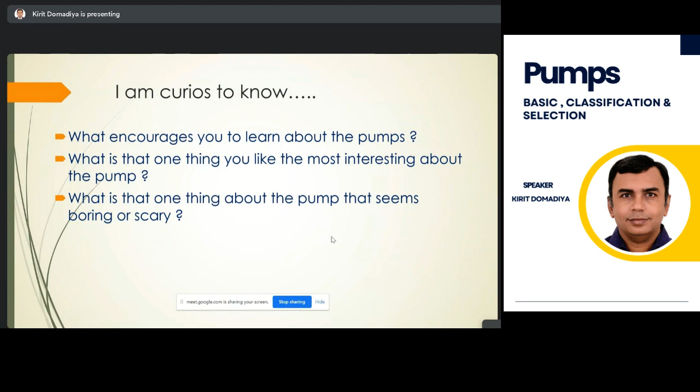Okay, let's get down to business. Now we'll start with the basics. So why, first of all, why pump? Whether it's a human body, or nature, or any industry, pumping water or any chemical or refinery products, when it comes to handling or transferring fluid from one location to another, some energy is required. So there are 3 kinds of forces.

When fluid travels from one portion to another, there will be some kind of losses. So we always require to raise the energy of the fluid. When we talk about the pump, fluid is always in the form of liquid. And when we talk about the compressor, it could be in the form of gas.

So the first thing is gravitational force. When there is an elevation difference, we always require a pump to transfer liquid from one height to the other. Like at our home, we would have experienced when municipality water comes at zero level, to transfer it to a third or fourth storey building or tank, we require some kind of small portable pumps.

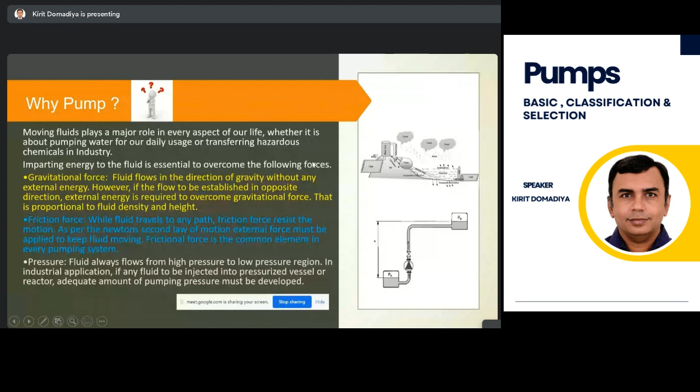So these are some of the rudimentary pumps, some of the very basic pumps we use in day-to-day life. All are one or the other kind of pumps.

So this you can say it's a positive displacement pump. This is an example of a positive displacement pump. This kind of pump you would have seen at home or in agriculture. This is centrifugal.

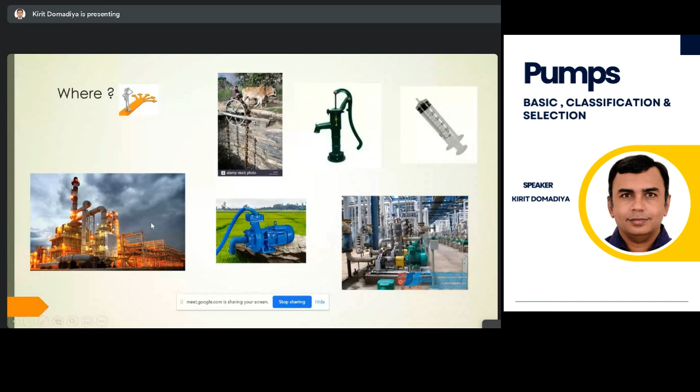Okay, now come to the essence and technical parts. So how to define pumps? It's very simple. Different books will have different kinds of definitions, but I'm not going by those complex words. In a simple manner, a pump is a machine which converts mechanical energy to useful hydraulic energy. It basically increases the energy level of the fluid.

So when we say hydraulic energy, it is normally a combination of flow and pressure. And mechanical energy is known to us, right? It's sometimes to and fro motion or rotating motion. So all this motion is called mechanical energy.

Now, source of mechanical energy, when we require... yeah, you want to ask something?

Source of mechanical energy could be an electrical motor, engine, or turbine. The motor was invented around 100-150 years ago, so before that there was no motor. In most cases, pumps were driven by either hand, engine, or turbine. But nowadays, the majority of industrial or commercial application pumps are driven by electric motors, mainly induction motors.

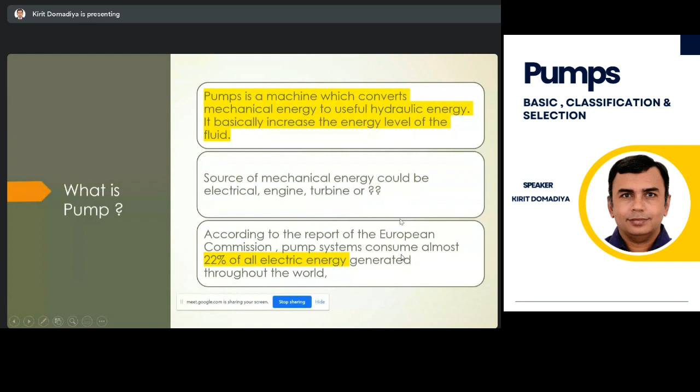Selection of pumps. Now we are diverting to purely industrial applications. We are not talking about agriculture, domestic, and other commercial applications, because we are all engineers, right? So when we have to select a pump for a given application, what all things should we have?

First, which kind of fluid we want to handle, right? Whether it's corrosive, whether solid contents are there, dissolved solids, what is the specific gravity of the fluid, what is the vapor pressure, viscosity. All these physical characteristics are required.

Then how much amount of fluid we want to transfer, right? That is called flow. Whether we want steady or pulsating flow is acceptable. What is the maximum required flow?

I hope you people are familiar with this metric unit, meter cube per hour, because in India and some Middle East and European countries, they are quite well-versed with this kind of unit. But America uses the imperial system, so their unit of flow is gallon per minute.

Now, how much height or head do you want to develop through that pump? Because one is flow and the other is head, the combination of both becomes the hydraulic energy, right? As the pump definition says, what the pump does is increase the energy level. So energy means flow and head, right? So what is the rated head we want from that pump?

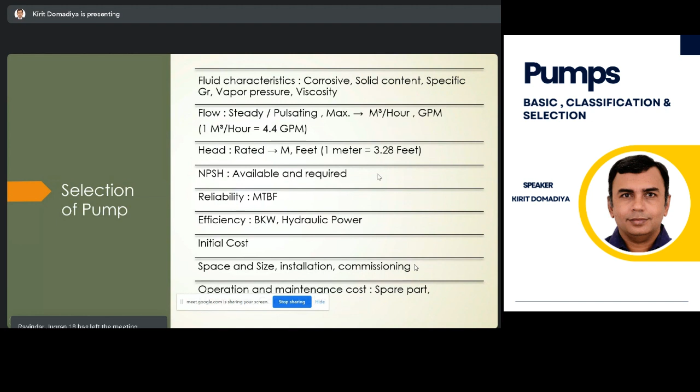Now, when we talk about the pump, normally we talk about head instead of pressure. Why? Let me explain with a simple column example.

Suppose we have three different columns, each filled with a different process fluid. The first column has a light hydrocarbon with specific gravity 0.8. The second column is filled with water. The third column is with some kind of slurry.

In each case, if we install a pressure gauge at the bottom, would it show the same pressure or different pressure, if the height and cross section of the column is the same? Different pressure, sir. Same amount of liquid in all three columns, volume is the same, but still different pressure. Okay, why is it like that?

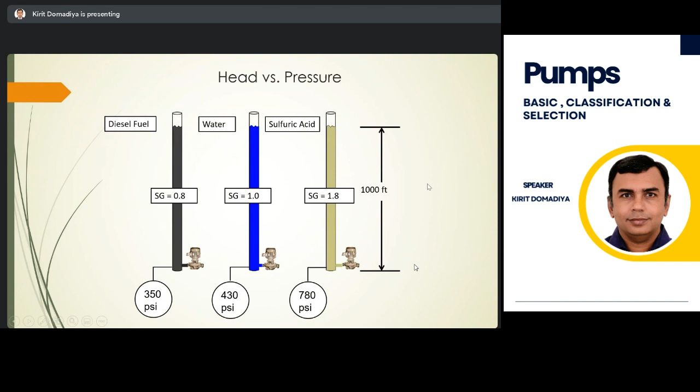Moving to the next. So now we have numerous pumping technology available in the market. To simplify, we can classify the technology into 2 types. One is a centrifugal pump and one is the positive displacement pump. So by the name itself, you can have some kind of indication what kind of mechanism is there in that pump.

In centrifugal, the fluid enters at the impeller eye. This disc is called an impeller, spinning at very high speed. So when fluid enters at that eye, the high velocity of the impeller transfers centrifugal force on the fluid, so the fluid also spins at very high velocity.

Velocity means kinetic energy, right? It's a mechanical subject, so if you have confusion, it's okay, you don't have to go that deep. But in short, it increases the energy level of the process fluid. When that process fluid gets collected into this volute casing...

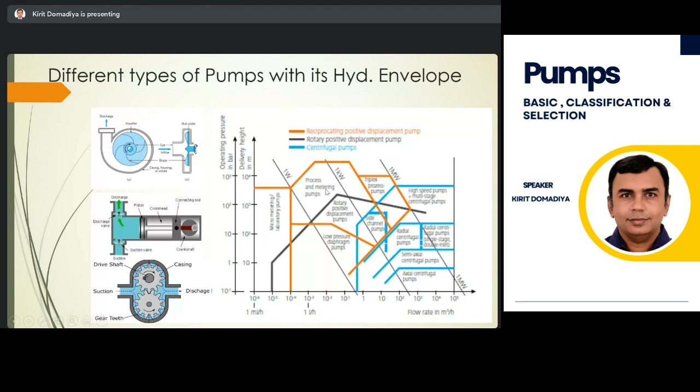So we have a variety of...

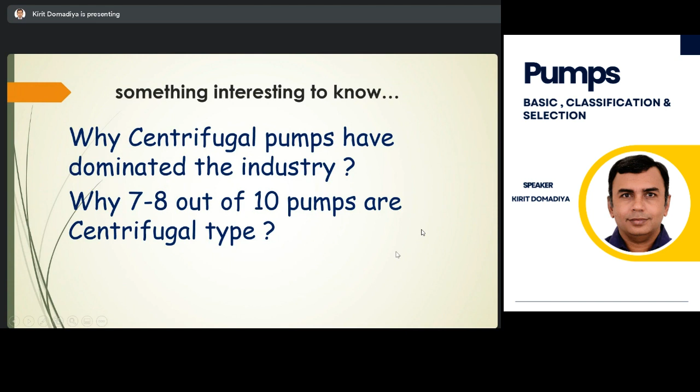With the technology, when it comes to centrifugal pumps, you can see it's a simple design, because construction-wise we have something like a spinning disc. The shaft is supported by bearings, to contain the fluid within the casing there is a mechanical seal. That's all, that is the centrifugal pump.

Easy maintenance, since there are fewer components we can maintain it easily. Smaller footprint. Vibration-wise too, vibration has a direct relation with reliability. If a pump is vibrating at a very high amplitude, then you can always expect low reliability, right? So required for the same amount of hydraulic output, it's low and small.

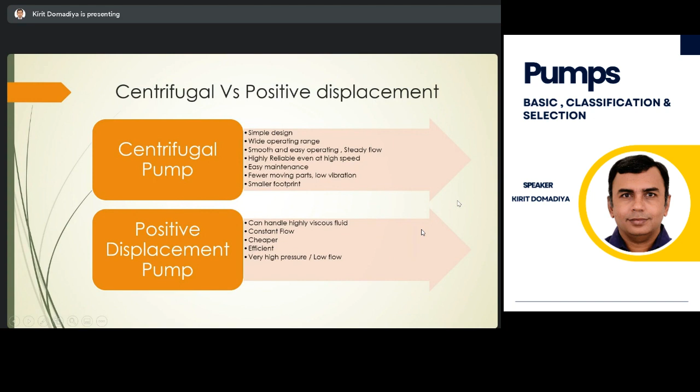So sometimes we think, okay, if we keep classifying the pump, it could be 50, 100, and keep increasing, right? But we don't have to memorize all this stuff. We just have to try to understand the basics. Being a chemical engineer, no need to go deep into the mechanical parts, but try to understand the basic principle.

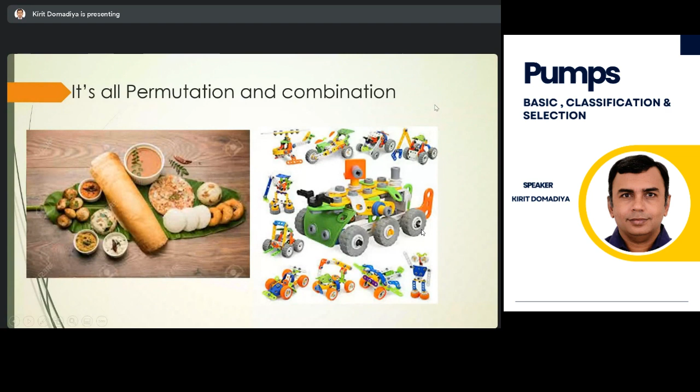So a similar analogy applies for the centrifugal pump. When you see a lot of different kinds of pumps, don't get overwhelmed or confused, the basic is the same actually. As we discussed, fluid enters at the impeller eye, it spins at very high velocity. Whatever fluid collects into the casing develops that velocity into head or pressure.

So when I say velocity, velocity, flow, and kinetic energy all three can be used synonymously. So don't get confused when sometimes I use velocity, sometimes flow, sometimes kinetic energy. All three are very similar things - velocity, flow, and kinetic energy.

So when I use head and pressure, those are also similar things. In centrifugal pumps, initially the impeller increases the velocity or kinetic energy. And what the casing does is slow down the liquid and convert velocity into pressure or velocity into head. That is the basic function of impeller and casing. Is it clear? So we just have to understand the basic things.

Each pump will have a casing, each pump will have an impeller. The principle will remain the same, it will not change. Based on the geometry, NPSH, radial loading, axial loading, and other things, pump manufacturers keep on inventing new things. And that's how API 610 classifies the pump into, I would say, a total of 18 different categories.

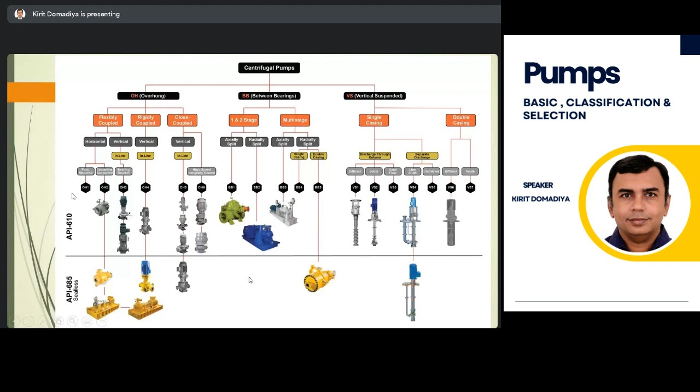As we know, more than 70% of centrifugal pumps are OH2 types. In industry, as we discussed, among all kinds of pumps, centrifugal pumps are the majority, and among centrifugal pumps, you will find 70% are OH2 type. You will find inline pumps, horizontal pumps, different types of impellers - open, closed.

You will find different stages of impeller, 1 stage, 2 stage. When there are multiple stages, it is called a multi-stage pump. So for any application requiring very high pressure, one impeller cannot meet that requirement, so a few additional impellers are required to be placed in series. That is called a multi-stage pump.

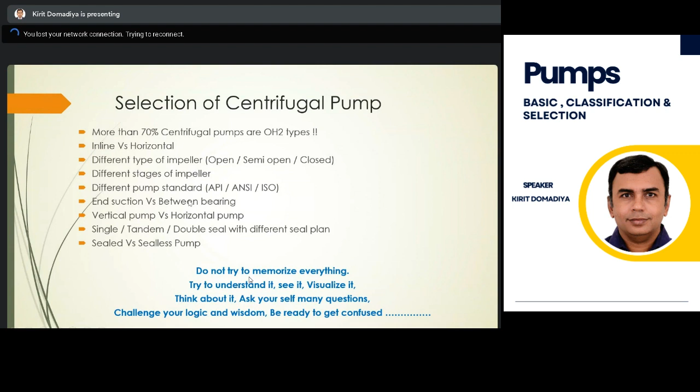Then there's the sealless pump. That technology is not new, but for some people who are not familiar, they feel it's new technology, but it has been available in the market for the last 70-80 years. Sealless pump technology is where you can eliminate the mechanical seal and seal API plans.

So again, do not try to memorize everything, try to understand it, see it, visualize it, think about it, ask yourself many questions, challenge your logic and wisdom, be ready to get confused. Is it okay? Are you confused or not? Hope I have not confused you by dumping a lot of information.

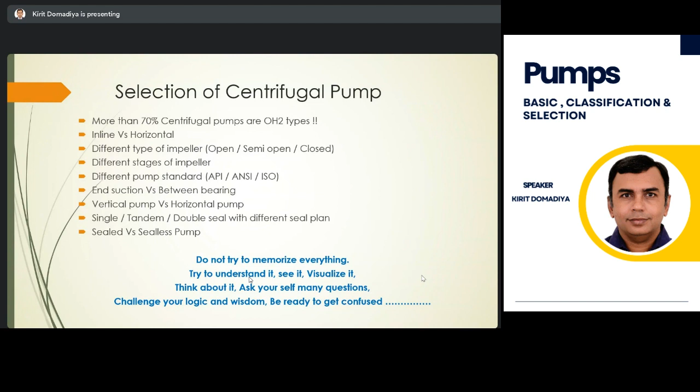What is the difference between mechanical seal and stuffing box? So the next slide I will show you the pump, so you can get the answer.

You want to see stuffing box, right? Can you see this? Hello? Yes, sir, yes sir.

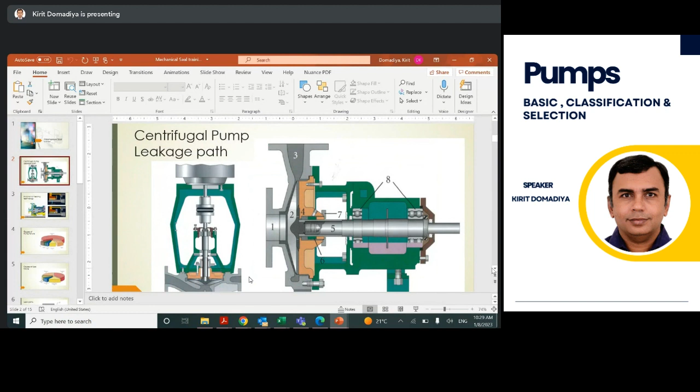So this is basically an OH2 kind of pump. You will find this type of construction widely used in any kind of industries. So this is impeller, this is shaft. When there is a rotating shaft, it requires some kind of support, right? Support means bearing, so you'll find one bearing here, one bearing here.

This impeller spins at this, two is the impeller, one is casing. The impeller spins at very high velocity. Whatever fluid enters at impeller, this is called impeller eye, entrance point is eye. Across this impeller vane or blade, the velocity will increase. At outlet, it will get collected into this casing, volute casing, and from that it delivers to a discharge point.

The rear side of the impeller, back side, will also have that fluid, and that fluid again is expected to have a high pressure. Sometimes the fluid is corrosive, abrasive, it could be lethal, it could be toxic, any kind of fluid is expected. So it is very important, very essential to contain that product within this pump or within this casing.

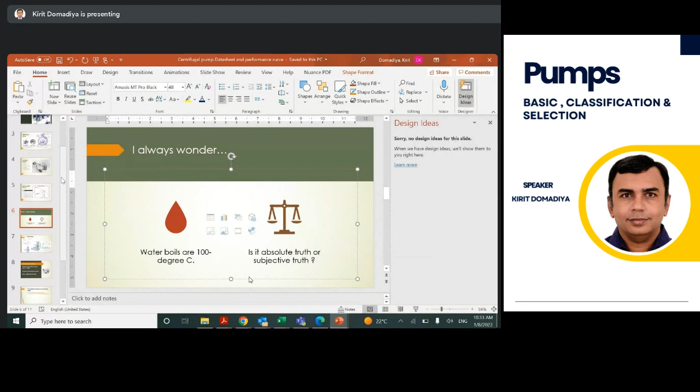When fluid enters into the impeller, here at outlet it will have a high pressure. If there is no protection or no sealing, then the high pressure fluid again will go back to the suction side. So this kind of low clearance will protect the pump from excessive recirculation. Still, there will be some amount of recirculation.

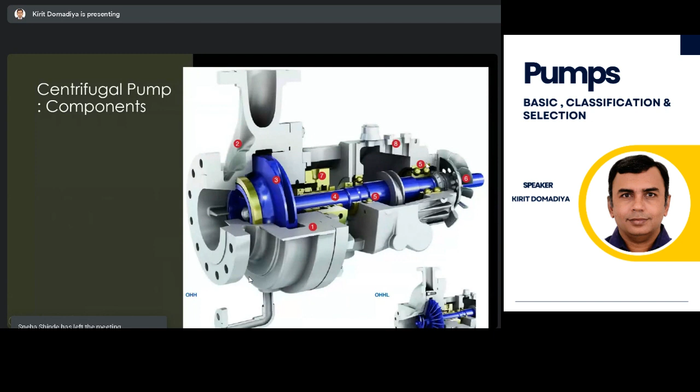This is the mechanical seal, this is the bearing. This complete part is called bearing box, or bearing housing. This is how a centrifugal pump works. So this is the impeller, it will spin, so at the periphery there will be high velocity.

This high velocity, when it slowly travels from the 12 o'clock position to 9 o'clock and then 6 o'clock, the area gradually increases. As the area increases, velocity reduces, and velocity will convert into pressure. So this is the basic principle of the centrifugal pump. You can find closed impeller, open impeller pumps depending on the process condition.

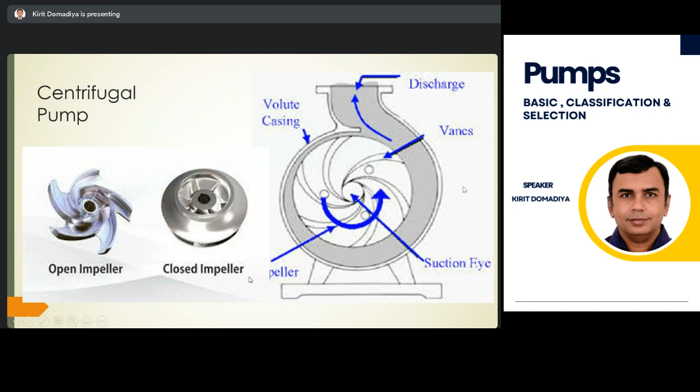Now the pump is not only about the pump, but it's all about the pumping system. Because when a customer complains sometimes, or the pump is not performing or has a reliability issue, the first thing we look at is the pumping system.

So in a pumping system, we have a pump, suction vessel, discharge source, suction source, suction piping. In the piping we will have one suction valve, isolation valve, strainer - a very important component. Then we will have an eccentric reducer and concentric expander, and a recirculation line - this is called the recirculation line.

Control valve and isolation valve. So this pumping system consists of all these components. So if pump has some issue, or in order to design a proper pump, we have to understand its environment, or a pumping system.

So when we, as a chemical engineer or process engineer, our responsibility is to develop some kind of a data sheet. Because if in your plant you have a requirement of one pump in a running plant, or during the project stage if you have a requirement of multiple pumps, your project team will ask you to give them a data sheet so they can approach a vendor for the procurement action. So it is the process engineer's KRA to develop a data sheet for the pump.

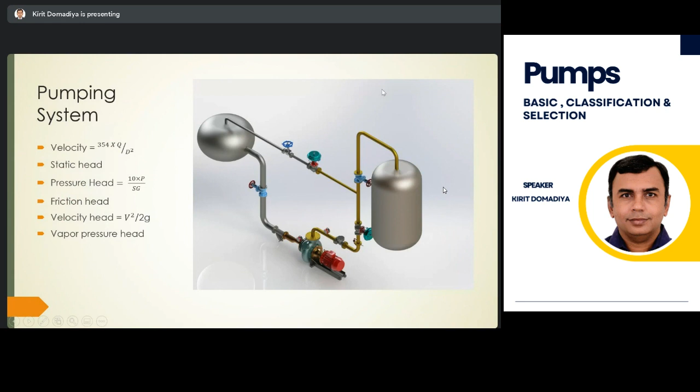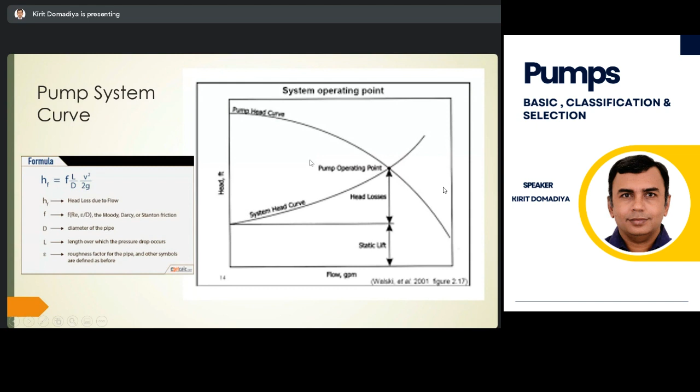Now I want to start discussing the most scary topic, that is cavitation and NPSH. For that, I want to know one thing from you.

Water boils at 100 degrees C.

So is it absolute truth or a subjective truth? It is subjective truth, sir.

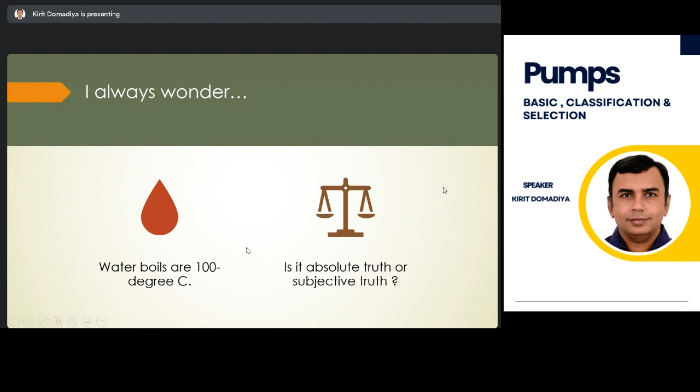Okay, what is cavitation?

So we have a certain suction pressure, right? So as it flows towards the suction nozzle, due to friction loss, there is always some loss, right?

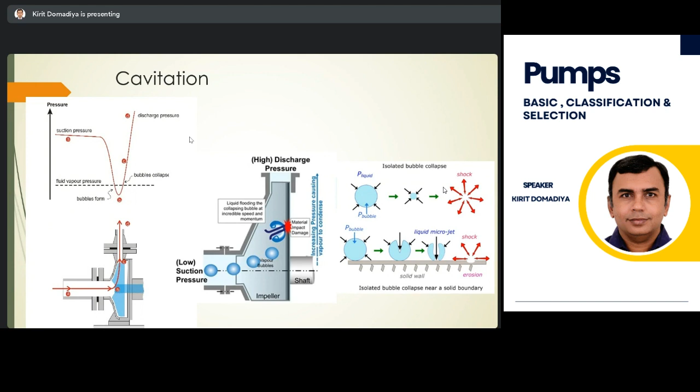So this indicator, NPSH, helps us understand whether the fluid supplied to the pump is in liquid form or vapor form, because we want to keep it in liquid form. In the field, getting an indication of NPSH is very easy - on suction, you always find a pressure gauge. Our idea is to keep liquid in liquid form, so as long as suction pressure is higher than the vapor pressure, the fluid will remain in liquid form. If vapor pressure is more than the suction pressure, the fluid will convert into vapor. Is it clear, or is it confusing? So our idea is to keep suction pressure higher, or vapor pressure higher? What is our ultimate goal?

Suction pressure - okay, so never get confused. Suction pressure should always be higher, right? Keep suction pressure higher, keep suction pressure higher, so cavitation will not happen. As long as suction pressure is high, cavitation won't happen. So you want higher suction pressure, not higher vapor pressure. You want suction to win, or you want vapor to win. If you want suction to win, then suction should be higher. Simple.

So during the design stage, when they do the system design, they have to communicate this NPSH available to the manufacturer or OEM, pump OEM, because the pump manufacturer will ask them, what is NPSH available in your system? So in that case, they have to do some estimation work.

Guess and estimation combined in industry is used as guesstimation, so they have to do some guesstimation work because the system is not there yet. So they have to just calculate based on the formulas and based on the anticipated condition. In short, they want to figure out what is the expected suction pressure or head at the suction flange.

So for that, the first thing is, if there is a pressurized source, then what is the suction pressure? HS is the suction pressure. They have to convert it into head because here they have to convert everything into a common currency - we are talking about head, not pressure. So whatever pressure or things we have, we have to convert into head, and then we can do some kind of algebraic sum. So if this tank has 1 kg suction pressure, we can convert it into head.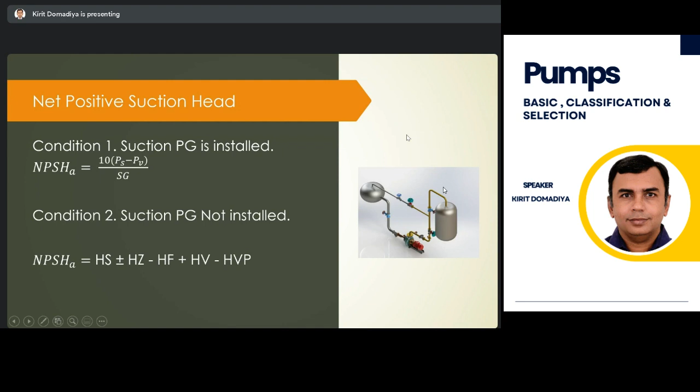So suppose you have NPSH available at site condition of 10 meters. Now if you communicate that 10 meters to the manufacturer, they say, okay, I have 5 different pumps. One pump requires NPSH of 8, one pump 5, one pump 11. So 11 you keep aside, I don't want that. So 8 and 5 you can discuss. Whatever value the pump manufacturer gives as NPSH required, we don't have to do anything about that - it's purely based on some kind of empirical or theoretical calculation from the pump manufacturer. We can't do anything about it. It's an inherent characteristic of the impeller.

So you got NPSH R and NPSH A. Is it clear to you?

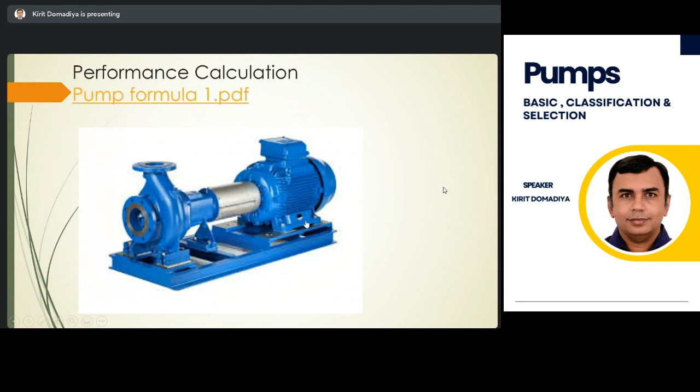So I quickly rushed through the data sheet and performance curve. We have 15 minutes.

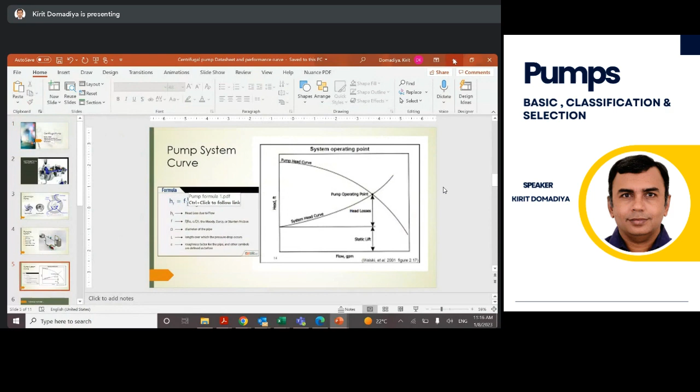So this is an API data sheet. The process engineer's job is to complete the input condition. During the project stage, you will be given this kind of an editable format. You have to fill it up by doing all the analysis, calculations, research. This is a basic naming of the equipment and tag number, everything, right?

Then here you can mention the liquid characteristic, what is it rated, what is expected. This is the operating condition you are looking for - NPSH at datum, pumping temperature, flow, right? This is what you are looking for, because you have figured it out through all the calculation.

This is the site condition and other things, whether it's indoor, outdoor, what kind of electric area classification you are looking for, right? Based on the type of industry.

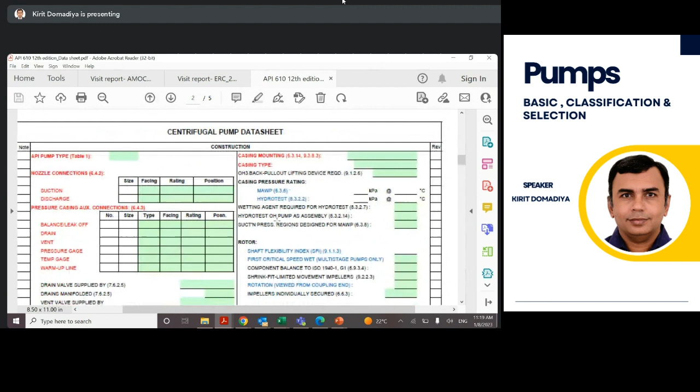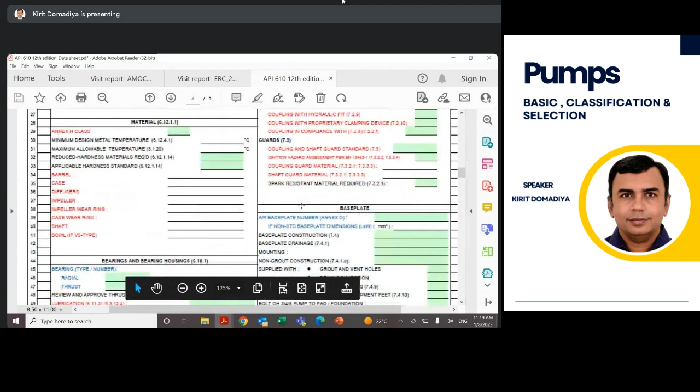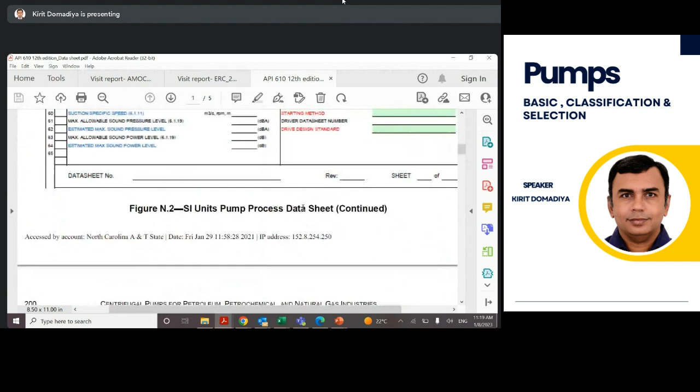So next stage is construction and all these things. I think project people or mechanical people, rotating equipment engineer will support you in filling this information out. It's not your duty, but it's a project engineer's job to do this. But first, figuring out the operating flow, pressure, and NPSH available is your main duty as a process engineer.

Hello, sir. Yes. Can you explain NPSH with example?

So with example, suppose if you have a suction pressure of 1 kg at pump suction, okay? Now, if you are handling water at ambient temperature, water vapor pressure at ambient temperature is almost like 0. So what will be your NPSH available? Because you have a suction pressure of 1 kg, and vapor pressure is like 0, we are considering it just absolute, right?

So in that case, we have like 10 kg of... sorry, 10 meter of positive pressure, because 1 kg means equivalent to 10 meter, since we are considering water. So we have 10 meter, but you know, the vapor pressure is in form of absolute pressure. So we have to convert this gauge pressure into absolute. 1 kg gauge is equal to approximate 2 kg absolute, because we have to add 1 kg atmospheric pressure. Are you getting this point? So 1 kg gauge is equal to 2 kg absolute. Is it clear to you, to all of you?

Yes sir, so pressure component always positive. Head component could be positive, could be negative, depending on the location of the suction tank. Friction loss always negative, vapor pressure always negative. So do that algebraic sum and you will get the final value. That is your NPSH available. So that's why this formula, you can see.

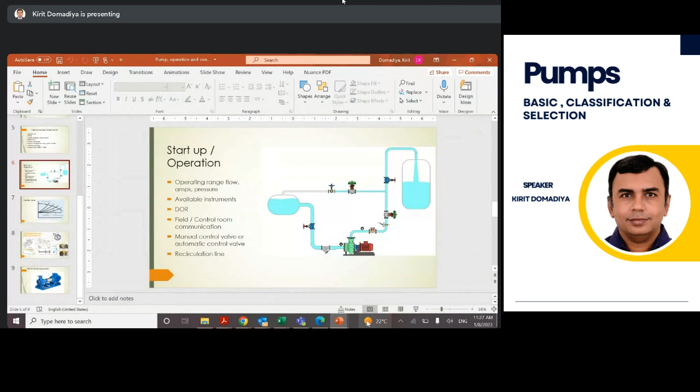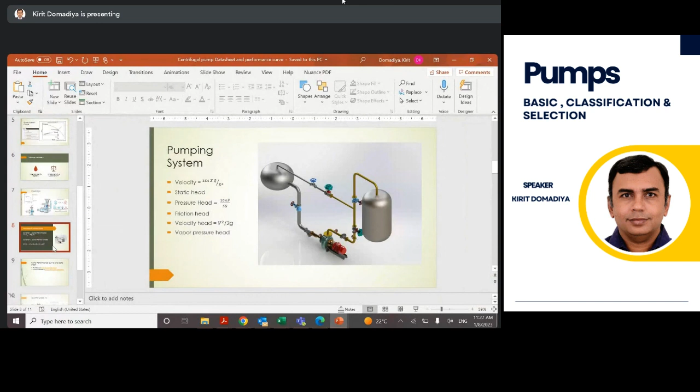So this is the formula, right? So okay, I will give an example. Suppose we have a, now if you have a notebook and pen, please try to calculate.

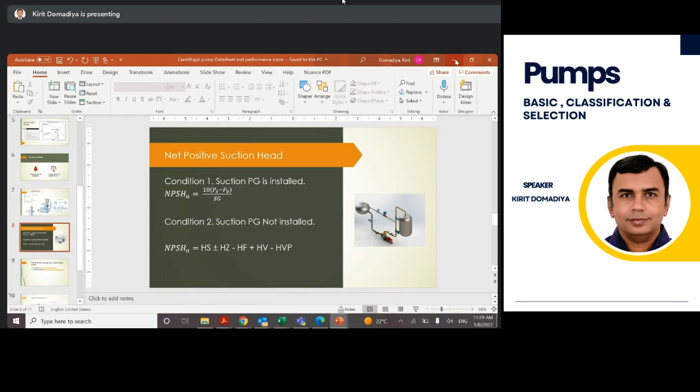So at suction source, pressure 2 kg gauge pressure, 30 meter height, friction loss of entire system is 25 meter, and the fluid vapor pressure is 2 kg, then what is the NPSH available? Please try to calculate.

So first we will convert all pressure into absolute, then we'll convert pressure into head, and then we will have four different heads. We will have suction pressure head, friction loss head, vapor pressure head, and static head. And we'll do the summation.

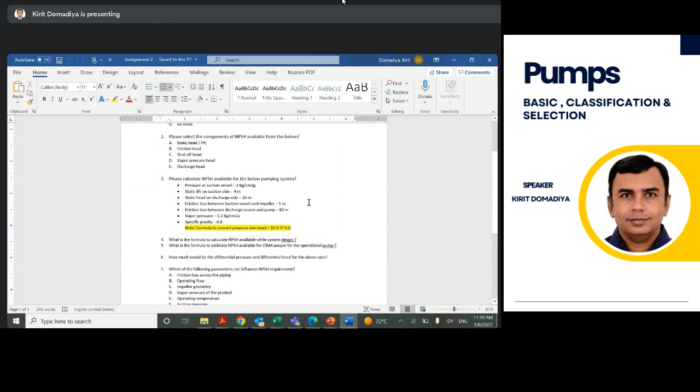Did anyone get the answer?

So I will try to calculate here. What is the suction pressure at source? 2 kg. Huh? 3 kg. Right? 2 kg. So we can consider this is 2 kg. So can we consider in absolute 3 kg, right? So 3 kg if we convert, we cannot do the conversion. Why? You know, because we don't have specific gravity, right? So assume specific gravity is 0.8.

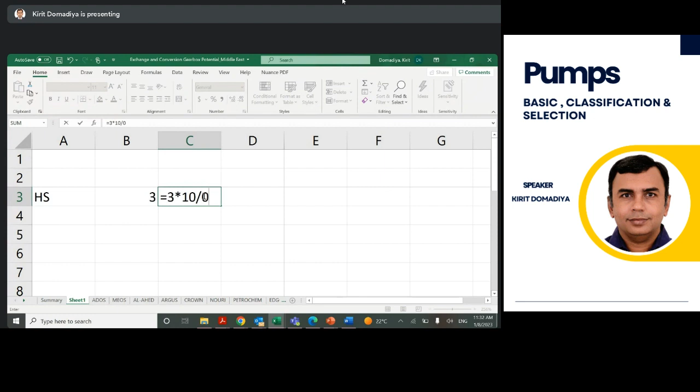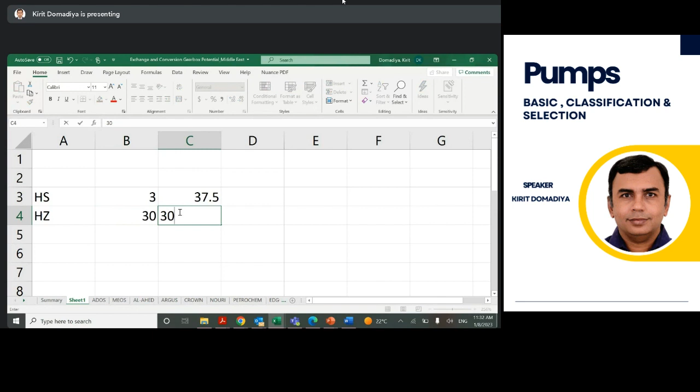Okay, so if we have a specific gravity of 0.8, then what would be the head? It is equal to 3 multiplied by 10 divided by 0.8, right? So this is the head we have with suction pressure, right? Now what is the static head, elevation? 30 meter. 30, right? Yes sir. 30, okay. So this is 30, right? This is, let's say, pressure head.

What is the friction loss? 25 meter. 25. What is the vapor pressure? 2 kg, already in absolute. So we just have to convert into head, right? It is already absolute, so what we will do: 2 multiply by 10 divided by, what is the specific gravity we assume? 0.8, right? Yes sir. 0.8, this is the vapor. So we got all 4 heads, right?

Now head will be positive, this HS will be positive, this will be positive, this we have to subtract, and this we have to subtract, right? So it is equal to this plus elevation minus friction minus vapor pressure, right? Our NPSH available is 17.5. Is it clear? Okay sir. Got it sir.

So you will get some examples from internet or somewhere, you try to do practice. It seems very easy, but you know, if you don't do practice now, then you will again forget it, right? You will find lift. Suppose instead of this, Z is lift, and instead of this being a positive sign, we make it negative sign, right? Minus minus 42, it's not good, right? So whatever fluid, that suction will automatically get...